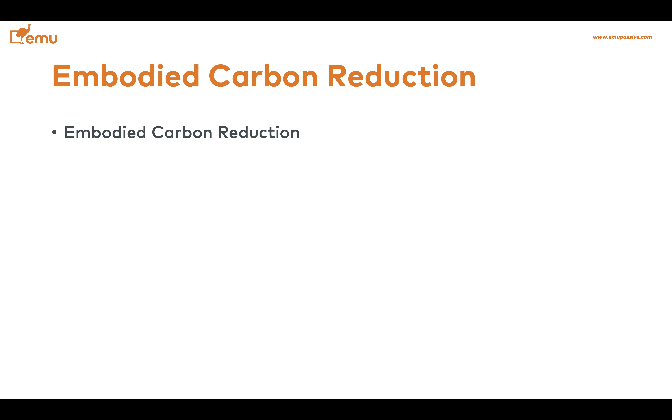In this video, we're going to cover how the building standards that we have included in this research address embodied carbon reduction. Specifically, we're going to talk about the reduction of embodied carbon requirements for each of these standards, as well as the concept of resource efficiency, which can be interesting when it comes to designing buildings that are energy efficient and have low carbon embodied in the materials used.

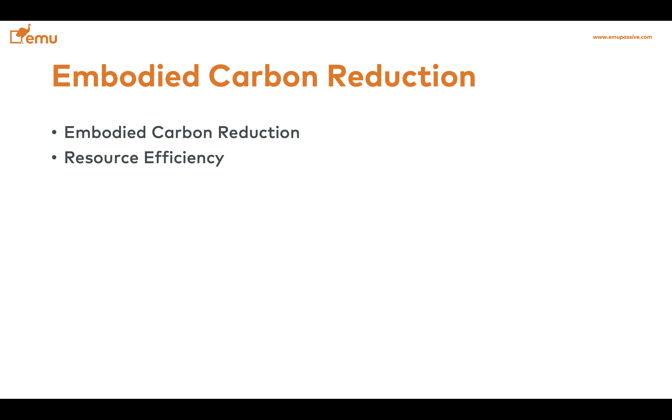So with the reduction of embodied carbon, there are different tools that can be used for each of these standards in order to reduce the embodied carbon for each project. But the reality is that at this time, none of the building standards that were included in the study actually have hard requirements to meet in order to reduce embodied carbon. So none of the 12 or so building standards that we have reviewed in this research currently have hard requirements in terms of embodied carbon reduction.

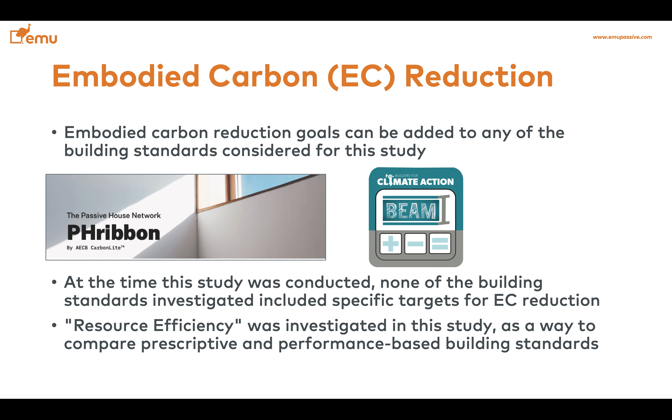Something that is very interesting is looking at the resource efficiency that we investigated for this research, and it's going to come up next. By resource efficiency, we have a goal of comparing a prescriptive approach standard to a performance-based standard and see how they perform. And we selected projects where the resulting operational energy efficiency will be similar between the prescriptive and the performance-based standard.

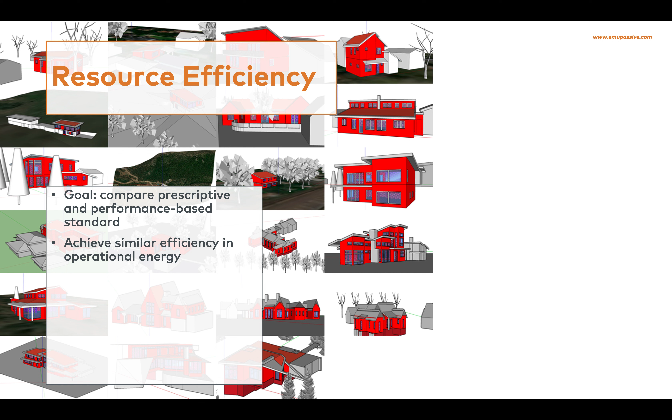And then we looked into how we can be more efficient in terms of resources, both in terms of cost as well as in material, because construction material has cost associated with that. And that's not just money. Cost is also embodied carbon. So we looked at that too.

The two building standards that we selected in this research for the resource efficiency comparison are PHI Low Energy Building standard, that is a performance-based standard, and Phius 2021 core prescriptive, and as the name says, it is a prescriptive approach.

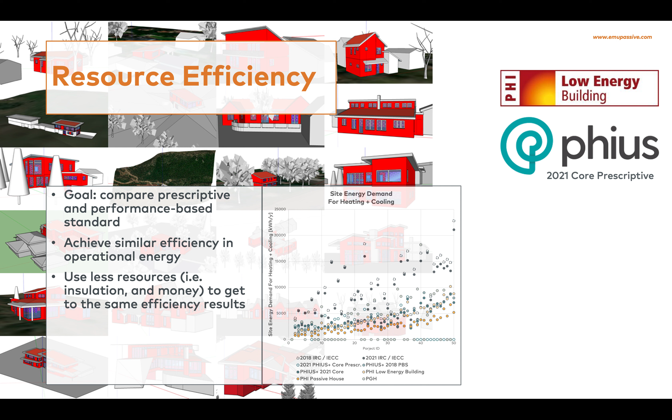This bubble chart shows the site energy demand for heating and cooling for the 50 individual projects and how they compare using the 2018 baseline energy code, 2021 IECC, as well as the Phius 2018, 2021, 2021 prescriptive, as well as PHI Low Energy Building and PHI Passive House, as well as Pretty Good House. In the graph, the Pretty Good House that shows 0 is where the Pretty Good House was not applicable to those standards.

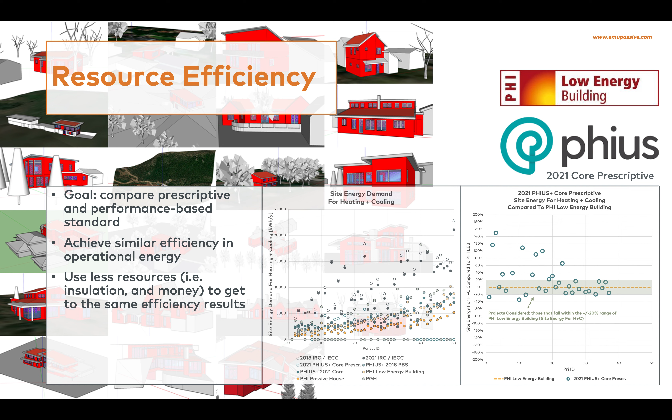In selecting projects that would fit the comparison for resource efficiency, it is shown in the graph on the right-hand side here, where we looked at projects modeled for the PHI Low Energy Building standard as well as the Phius prescriptive approach. We selected projects where the two, performance-based and prescriptive, would come within plus or minus 20% energy efficiency of one another. So in other words, we looked at a prescriptive approach and a performance-based approach that would yield similar energy performance, and we're going to compare how more or less efficient in terms of resources these standards are. So look at the resource efficiency.

We looked at A, the prescriptive approach. In this case, we selected the 2021 Phius prescriptive. And B, performance-based. In this case, it was the PHI Low Energy Building standard. And we looked at projects of the 50 that we considered. We narrowed it down to the ones where the Phius prescriptive approach was applicable. Please have a look at the video we did to cover the applicability of different building standards.

And within these, we looked at which projects the 2021 Phius prescriptive and the PHI Low Energy Building standard would come within plus or minus 20% of each other in terms of site energy demand for heating and cooling.

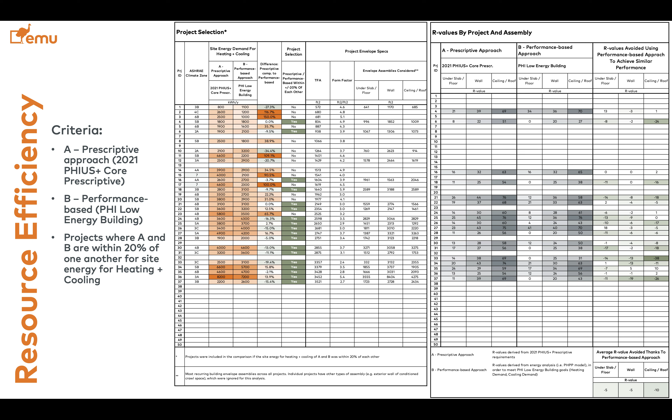And based on this, we started looking at which building standards would get you to a similar, plus or minus 20%, site energy demand of one another with less stuff used, like less insulation, for example. So looking at resource efficiency, we found that 18 projects fit the criteria. So for 18 projects, the performance of the Phius prescriptive and the PHI low energy building would come within 20%

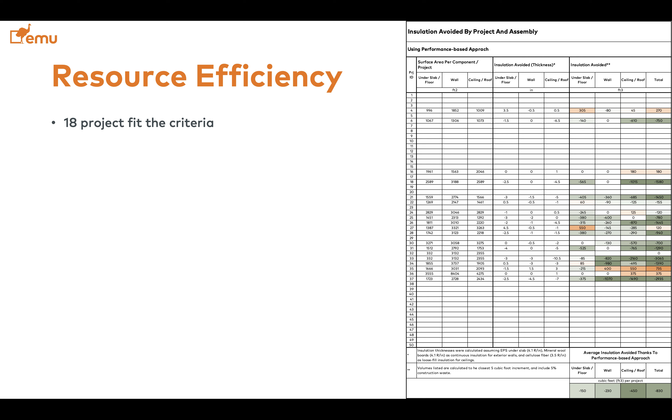of one another. And then to get to the same performance, we found that the performance-based approach allowed to save a lot of stuff. Like on average, we found that you need over 800 cubic feet less of insulation to get to the same energy performance for a performance-based standard, because by means of the energy model, you actually know what you're doing. It's simple as that. With the use of the energy software, you know where you're getting the best payback for the insulation at your wall, your ceiling, and so forth.

And some key parameters, including, for example, selecting the right coating for the glass, the solar heat gain coefficient, made a huge difference. And this is something that is extremely important to understand. The closer we get to zero energy consumption in buildings, the more all of these details matter. And this is where prescriptive approaches fail, because you just apply individual requirements to components of the building envelope, but you have no idea of how the building is actually performing. Whereas for the performance-based standards, by means of the energy model, you actually know what you're doing. It's literally as simple as that.

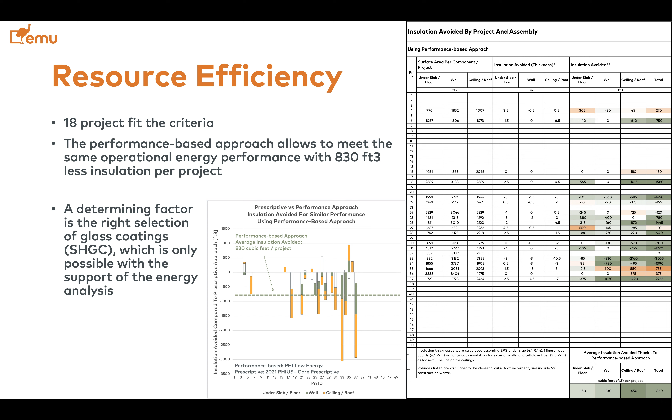So on average, we found that to get to the same energy performance, PHI low energy building required 830 cubic feet of insulation less. That's a truckload. That is thousands of dollars of less insulation to pay. And we cannot relate this directly to embodied carbon, but if you're needing 830 cubic feet less of stuff, your embodied carbon footprint is going to be less.

Then we also looked at the cost of the energy modeling. And in this table, we listed what we charge our clients. Again, these are 18 projects from our modeling. And so we looked at how much we charge for each project. And on average, we found that even when you account for the cost of the energy model, performance-based approach would save over $5,000 overall, because you need a lot less insulation to get to the same performance.

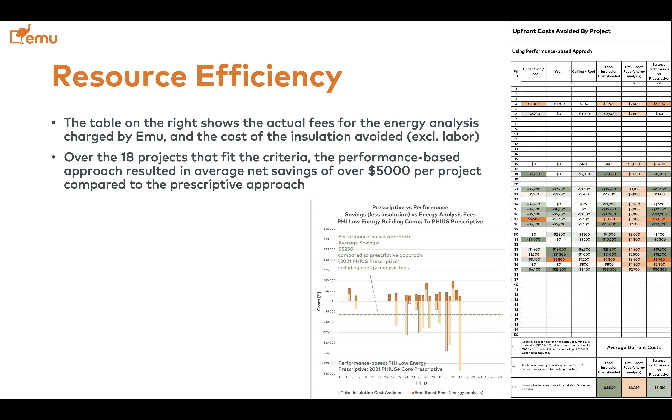So this is not really about comparing PHI and PHIUS. This is more about understanding that if you're using a prescriptive approach, you're going to end up over-insulating and overdoing certain things because you don't actually know what you're doing, because the prescriptive approach is something that really doesn't deal well with high performance. This is the average that we found, that on average, including our modeling fees, the savings per project were over $5,000 by pursuing the performance-based approach.

So we come to the scoring for the embodied carbon reduction. We see the criteria that we have listed. Embodied carbon reduction goals: none of the standards that we have reviewed for this research have hard goals for embodied carbon reduction. So none of them scored any of those 10 points that we allocated to that criteria. And then those building standards that do have a performance-based approach do get the remaining 10 points for the resource efficiency.

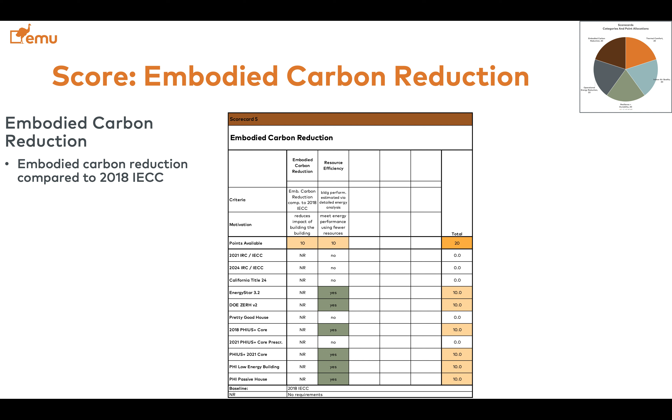In other words, the embodied carbon reduction was benchmarked against the 2018 energy code, but really none of the building standards that we reviewed provided any hard requirements for that. And then the resource efficiency we describe: whichever building standard requires a detailed energy analysis was allocated those points because it allows to meet the same energy performance by using fewer resources, both in terms of bulk insulation as well as cost overall.

And this is what the allocation of points looks like for the embodied carbon. Basically, none of the standards received the full 20 points because none of the standards have actual hard requirements for embodied carbon reduction, but the standards that have a performance-based approach then do get some points because they allow that flexibility that prescriptive approaches don't.